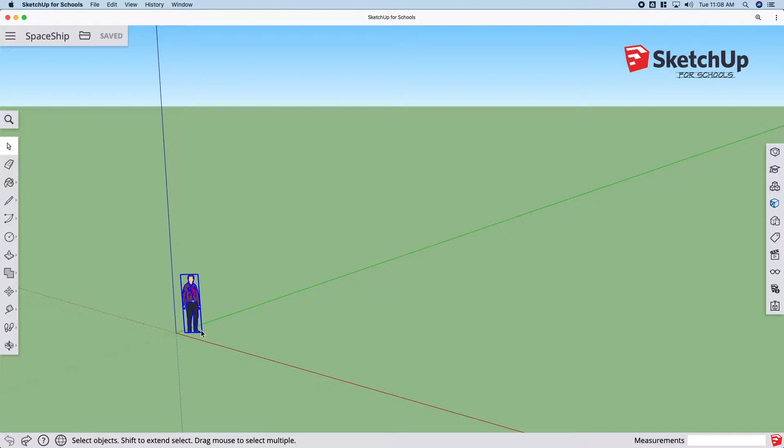You know what, I'm gonna keep him in there so I can keep him in place here for scale. So I'm not gonna be typing in a lot of numbers when it comes to building this because I'm just making this up kind of as I go along. I'm gonna start with the rectangle tool and build this thing here, putting in a little bit of a shape to get started. Then I'm going to push it up and use the scale tool and the move tool to distort it.

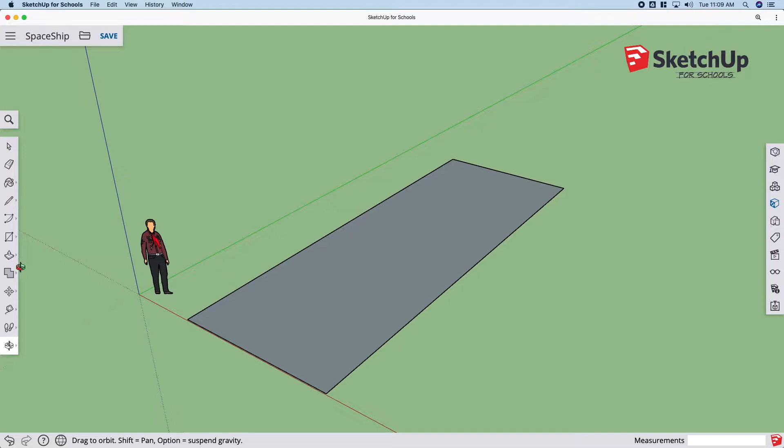Let's get some geometry. If you remember from the last video for the Lego, I used the line tool to build some geometry so I can make stuff. In this case, I want this here so I can have a line of symmetry and help build this to be the same on both sides when I do this.

So if I go from here to here, now I can pull this all the way across. You see how it's snapping to the red lines? That's really nice to be able to do. I'm going to do this here, okay.

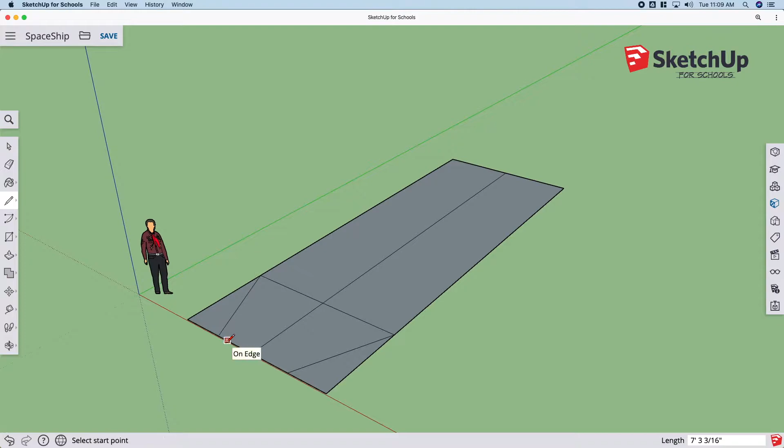I think my ship kind of tapers a little bit here in the back, so I'm going to do a little bit of that. We'll see how this looks. Now I'm going to take out a lot of this little bit of geometry that I put in here and start pushing it up, I think.

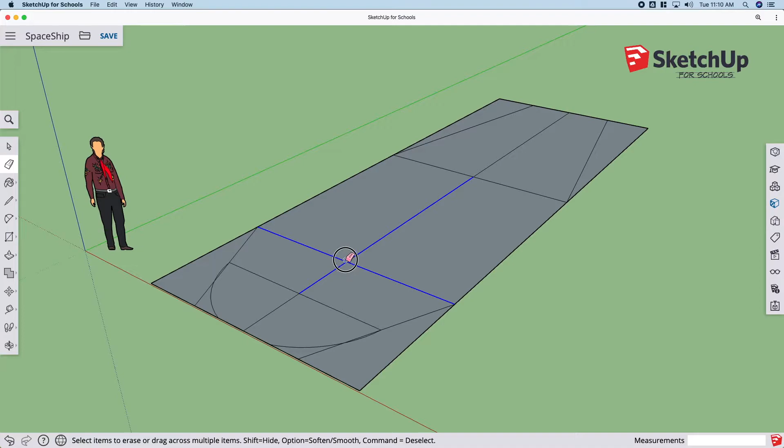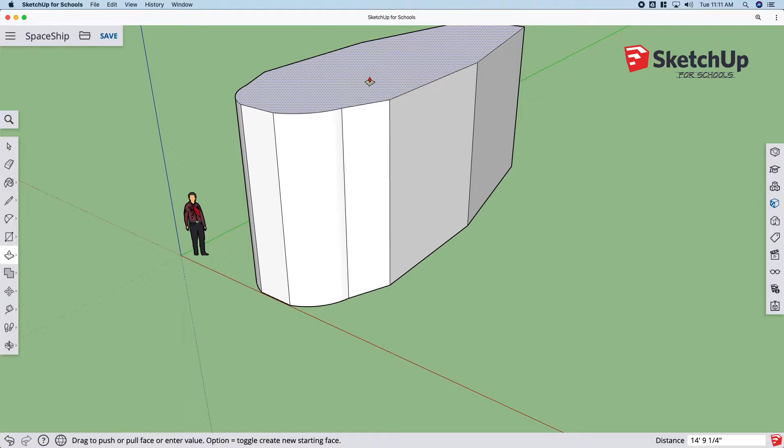This is going to be pretty tall, maybe 3 times taller than the person is here. So the person's 6 foot tall, 12, up to 18... well, maybe not that tall. We'll call it almost 15 feet tall here.

I'm going to cut this in the back, kind of on 2 points there. Yeah, that's what I thought — it wasn't on the surface. Sometimes that happens.

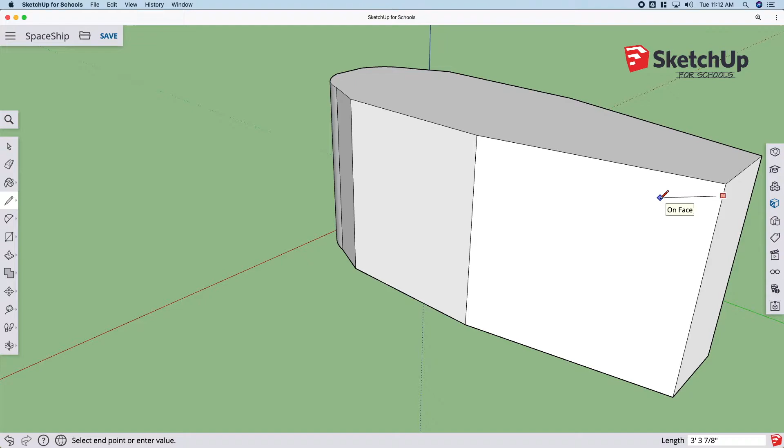Let me change my angle a little bit. See how when I pause here it says 'on face' — that's where I want to be. Go to the midpoint there. On face.

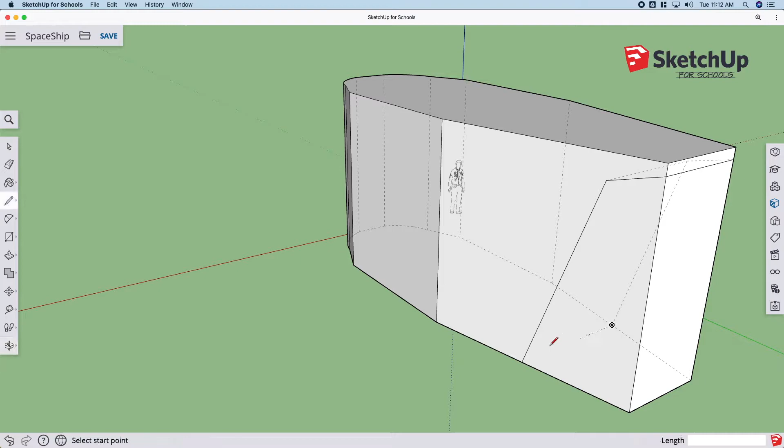I know that looks magical right there, but I was just using my invisible lines to build the same geometry on the other side. I'm going to put a line across the inside here, and then if I take this stuff out right there, now I've got this tapered piece in the back.

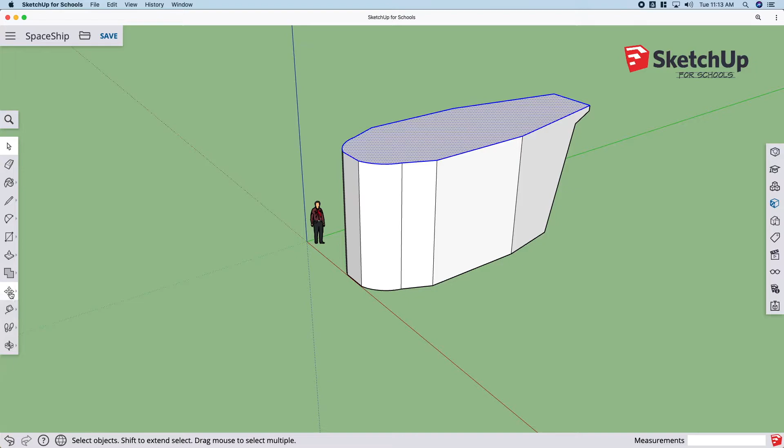Here's another trick: I'm going to double click on this and just select the top part here, and then I can use the scale tool and distort this guy a little bit, and I can hold down the control key and make it bigger overall.

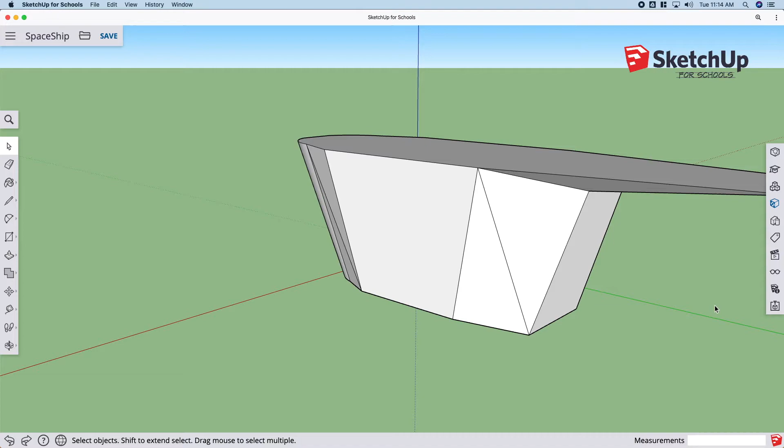Oop, not what I wanted to do. Go back for a second — I was moving something and I left this part selected. I'm going to unselect that and then try to modify this intersection here.

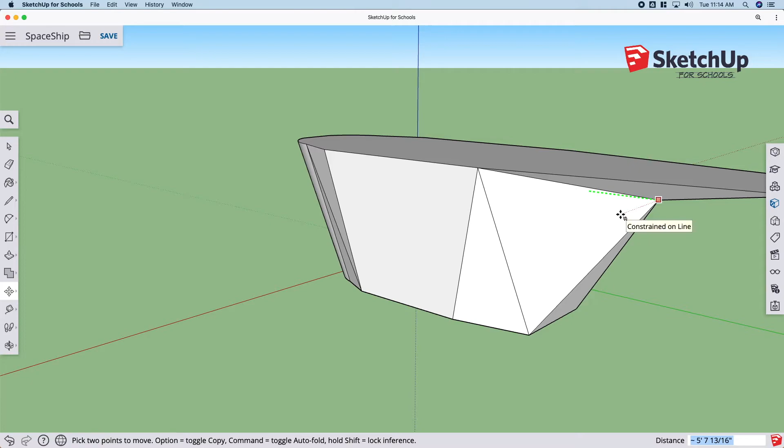Nope, I want to go this way. Nope, I don't want to go that way. Yeah, okay. So what I did was I constrained the direction — I hit the left key, so it's constraining along that green axis. I'm going to pull it out a little bit this way.

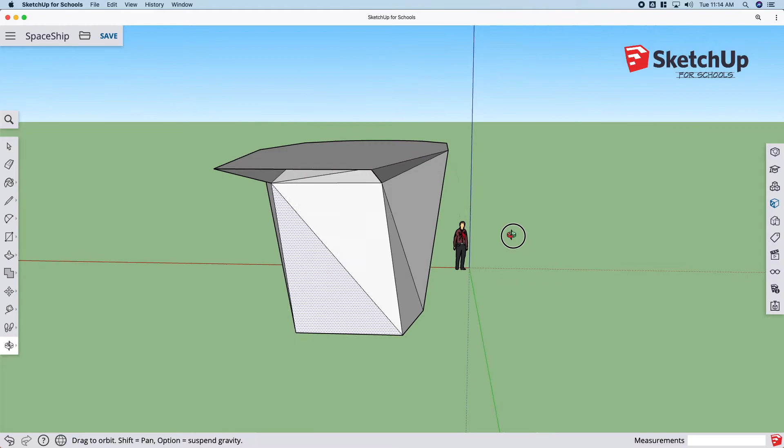I'm going to do the same thing to this side, hitting the left key to constrain it on this side also. Problem is I'm going to have a hard time making it square — you can see it's added in these triangles because this stuff isn't perfect, but this is okay. I'll take this. This is a good start.

I wish I could find a way to pitch this side down a little bit. I want this to be a little more rounded at the top.

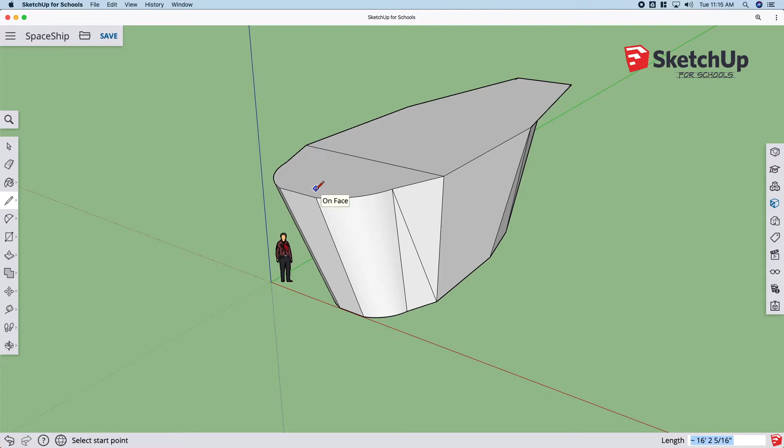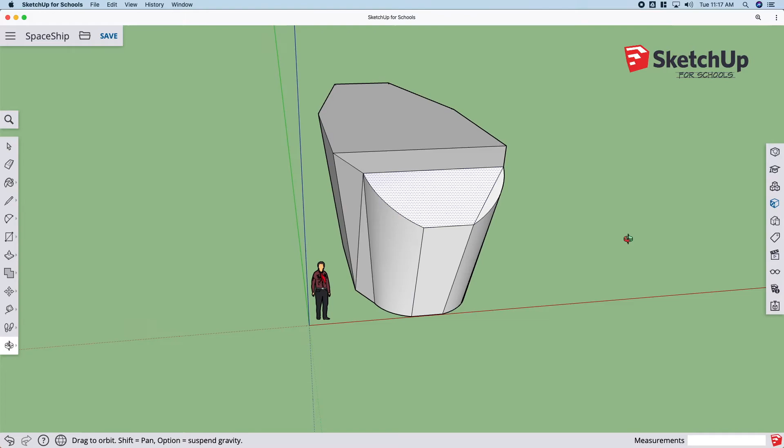So I'm just pulling these lines down a little bit using the move tool to distort this a little bit here. Sure, I'll take this — this is okay. I need some wings here.

Let me see if I can figure out what the wings should look like. I wonder if it's just going to let me draw a rectangle on the surface of it. Yeah, looks like it might.

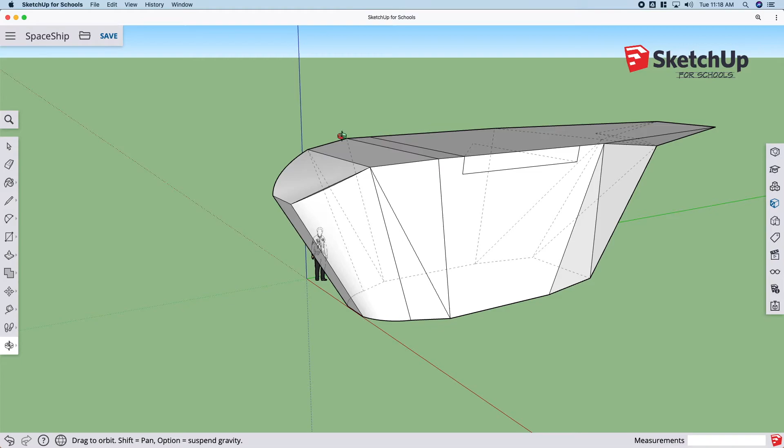Pulling some lines of geometry across so I can match that up on the other side. So if I make a rectangle here, I can go to there. I can take these lines that are coming across here out now. I can leave this line in there for now because I might want it.

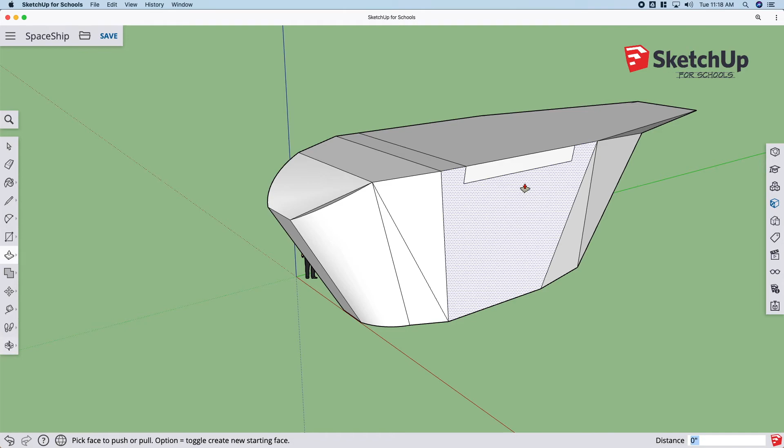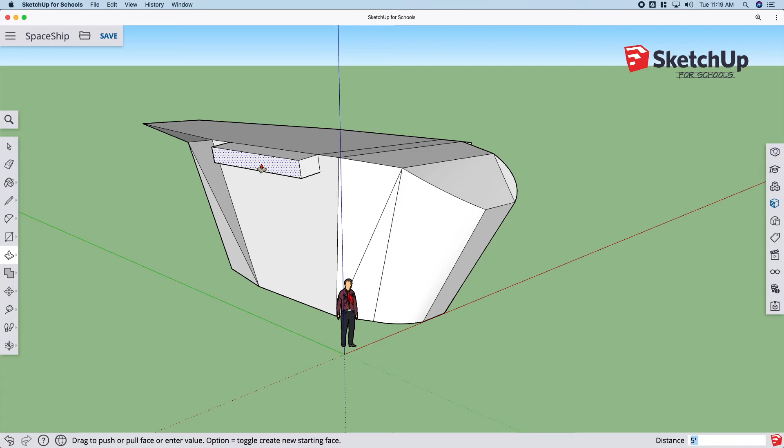Let me see what happens if I push this out. I'm going to type in 5 feet so I can do the same on the other side. Now it's pitched — I'm going to fix that. Okay, so I'm going to go this way, it's on an angle. I'm going to type in 5, and the one little tick mark — I guess it would be an apostrophe — to set that distance.

But I don't like that these are pitched down. I want them to pitch up. I kind of like to see this be more or less even across the top here.

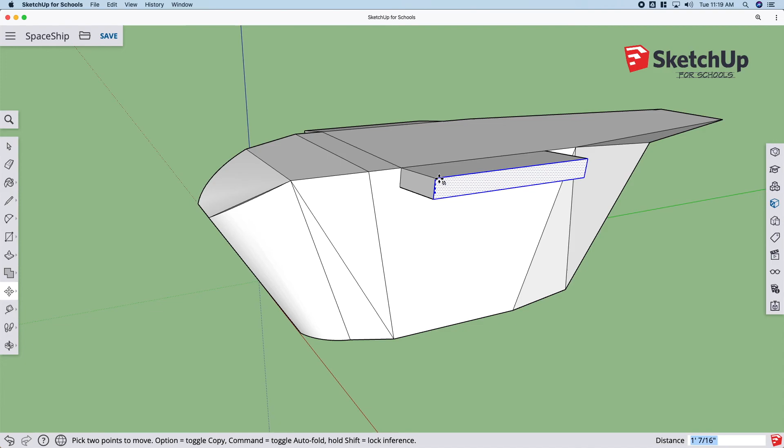So I'm going to hit spacebar to get the selection tool, use the move tool, and see if I can move that up, constraining it up and down. Actually it's pitched up a little bit, and I'm okay with that. I'm going to do this though.

I need a mark — something to match up to on the other side. So I'm taking a line across over here. When I don't close it, it wants to keep drawing a line, so I'm going to hit the escape key so I can just put that line out there and not worry about it.

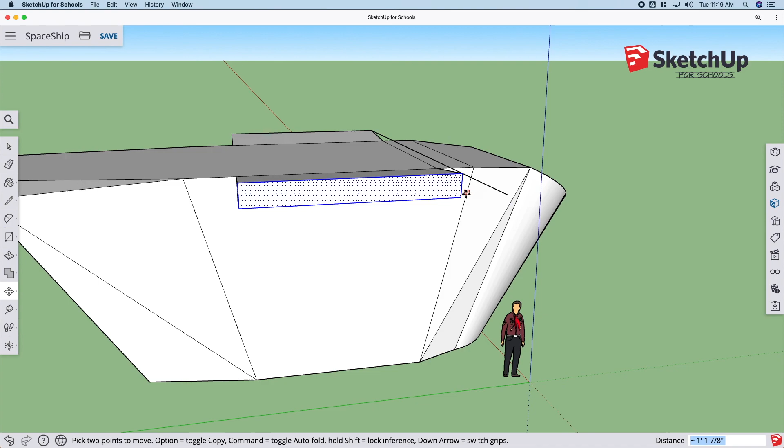Now I'm going to click on this surface and move it up, constraining it up and down until it hits that line. And now I know I've made both those even right there.